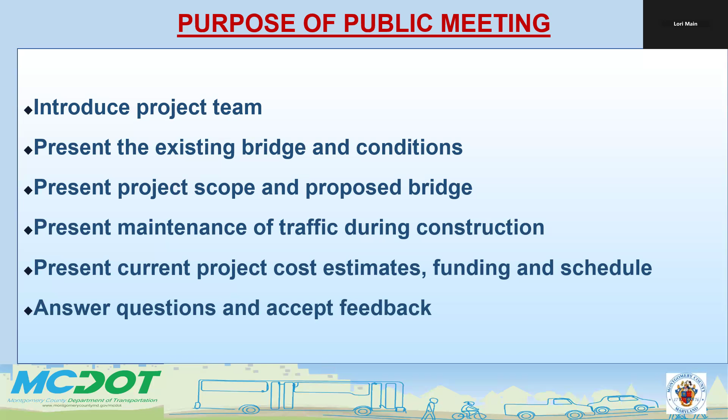Okay, project team. So the project team consists of Montgomery County Department of Transportation, Montgomery Planning, Rustic Roads Advisory Committee, and Mercado Consultants as the engineering consultant. Throughout the design of the project, we work and coordinate with all these team members to successfully implement the project. Montgomery County DOT is the bridge owner and responsible for managing the design and construction, securing the funding, acquiring of right-of-way or easements, public outreach, collecting community input, and coordinating the project with relevant state and federal agencies.

Montgomery Planning is providing recommendations for master plan implementation. The Rustic Road Advisory Committee is providing recommendations to preserve the historical, scenic, and agriculture character of the area. Mercado Consultants is the lead consultant and is providing engineering services to develop contract documents, including design plans, specifications, and construction cost estimates. The consultant will obtain all the required permits and will also provide engineering services during bidding and construction.

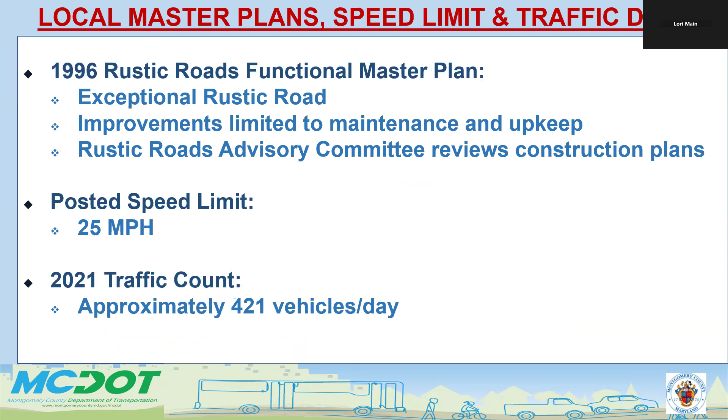Okay. I think we skipped a slide there, didn't we? Oh, there we go. Okay. Now go back. One more. There we go. All right.

Uh-oh. Oh, Lori, what happened here? Sorry, guys. Brian, when you use the mouse as a pointer, can you let go of it after you do that? Because I can't use the mouse at the same time as you are. Okay. So yeah, just as soon as, okay, and this is the next slide. Sorry about that, everyone. All right.

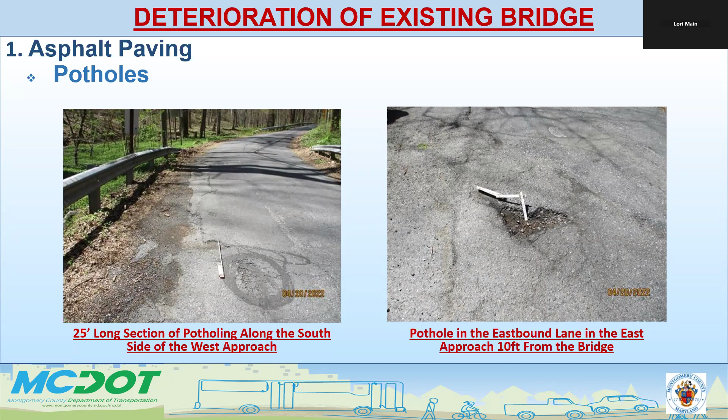Okay, so the most recent bridge inspection conducted in April 2022 revealed continued deterioration of the existing bridge. We will cover the most evident issues starting with the top side. Here we have two photos showing pavement potholes. These are on the approach roadways. The potholes are minor issues and don't pose an immediate hazard. In the next couple of slides, we will take a look at the underside of the bridge. Next slide, please.

So basically the deck is a steel corrugated plank deck with asphalt on top of it. And it's really a porous decking type system. So it lets water through it down to the metal components underneath the decking and the steel beams. So all that water and salt that gets dumped on it in the wintertime gets down there and just corrodes the beams. Next slide, please.

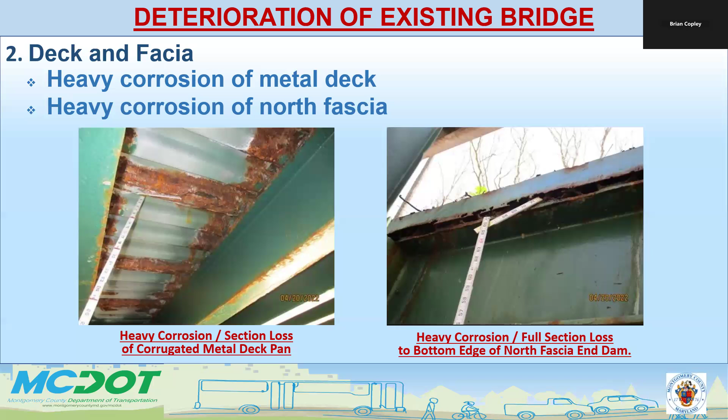Let's see, I'll attempt to use the pointer here. Now I'm screwing it up again. I won't use the pointer. Can you go back, please? You have the pointer now, Brian. Okay, can you go back a slide? Absolutely.

So the first question you might have is, is the bridge safe? Yes, it is safe. The April 2022 bridge inspection did not identify any immediate hazards. The bridge was rated to be in poor condition and is scheduled to be inspected on a regular basis, with the next inspection being April 2025. MCDOT is working proactively to rehabilitate the bridge before it becomes a safety hazard. Next slide, please.

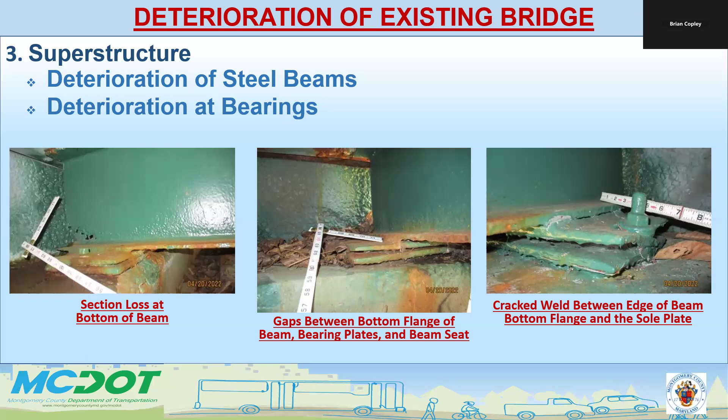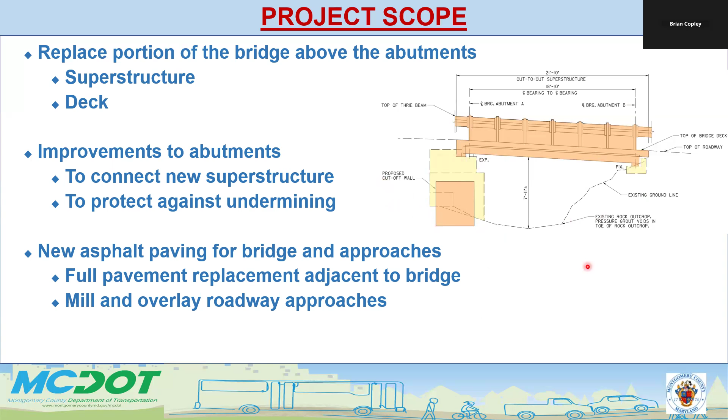That's the superstructure. A preliminary investigation revealed that replacing the abutments would significantly complicate the project due to the presence of rock. By reusing existing abutments, we are able to simplify construction and reduce the overall cost of the project.

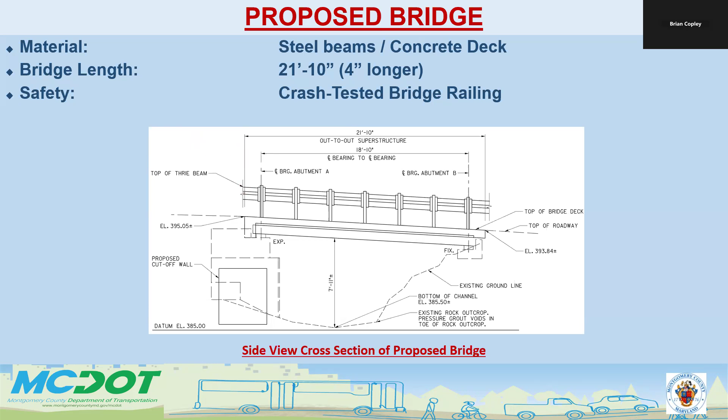Next slide, please. The bridge width will be increased slightly by 6 inches to allow for a clear roadway width of 18 feet. This is the clear roadway width here, from railing to railing. The intent is to better accommodate farm equipment used by the local farmers. A modern safety railing will be provided on both sides of the bridge.

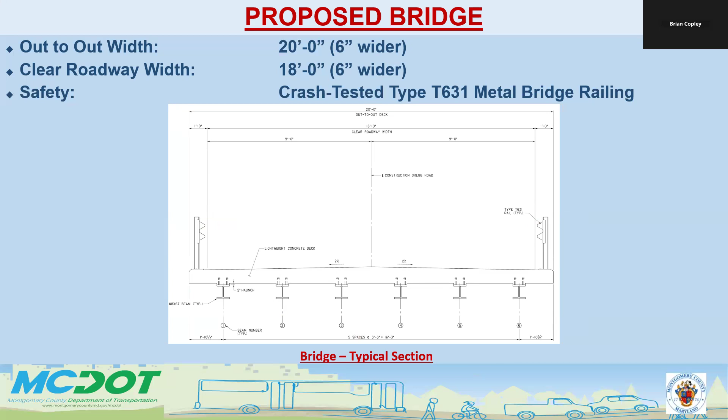Next slide, please. So this is a photo of the approach roadway looking east towards the intersection with Gregg and Georgia Avenue. The bridge is located right here. Next slide, please.

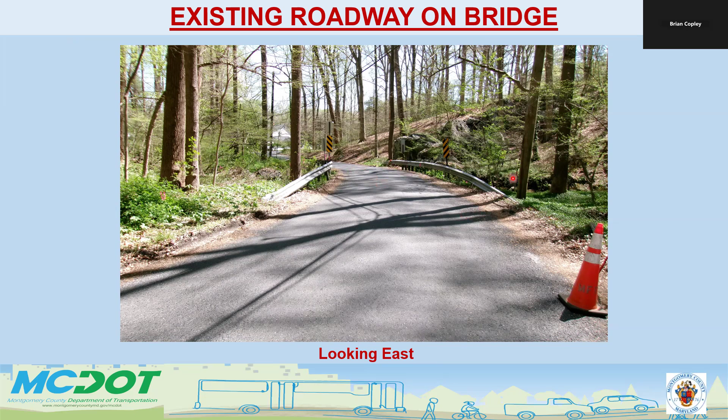So here we have a plan view of the proposed bridge with dimensions. The proposed dimensions are over here. We have 18-foot clear roadway, 20 feet, 22 feet out to out. Existing over on this side, 17.5-foot clear road, 19.5 out to out. The cutoff wall will be installed over here to help protect the abutment.

The water flows from the south side underneath Gregg Road towards the north. It basically comes in from the west, like heading east to the south underneath like that.

As part of this project, MCDOT will work with owners of properties along Gregg Road to secure any right-of-way or temporary access rights we need to facilitate the construction. Our property acquisition section will be reaching out to the individual property owners as needed. The adjacent properties are private property. There's no parkland here. Next slide, please.

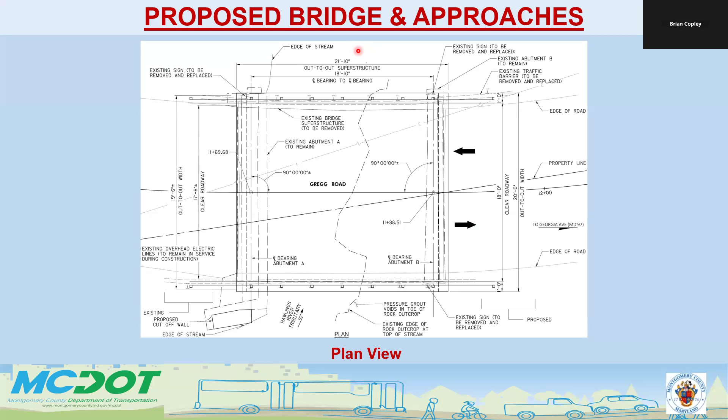So to do this construction, because of the narrow aspect of the bridge, we're going to have to close the road to safely do this construction. Not only for the construction workers, but also for the traveling public. This is the safest way to go about doing this project.

Unfortunately, as you can see, there's really no good short detour route around this project. So working with our Division of Traffic Engineering, our proposed detour route is as shown here. It's approximately 5.2 miles. Depending on the direction of travel, motorists may use Georgia Avenue or Zion Road to get to Brookeville Road.

The detour will be in place for the duration of construction, currently estimated to be 4 to 6 months, but a good contractor could probably get it done quicker than that. But to be safe, we're going to say 4 to 6 months. Next slide, please.

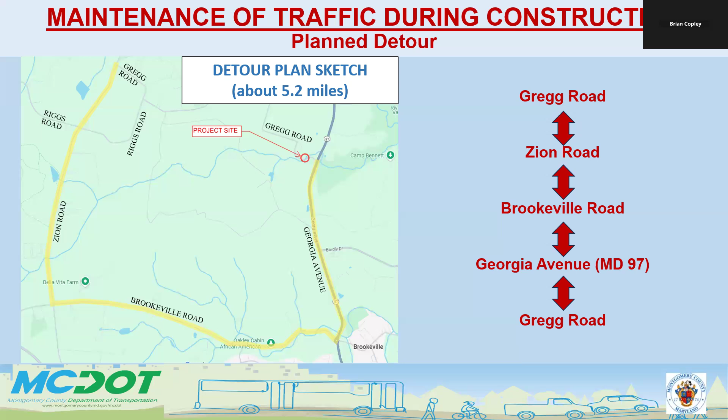So we are about midway through the design process, with the design about 65% complete. This design is fully funded by Montgomery County, with general obligation bonds being the primary source of funding. The estimated cost to complete the design and obtain permits is about $225,000. The estimated cost of construction is about $1 million. At this time, construction is not funded.

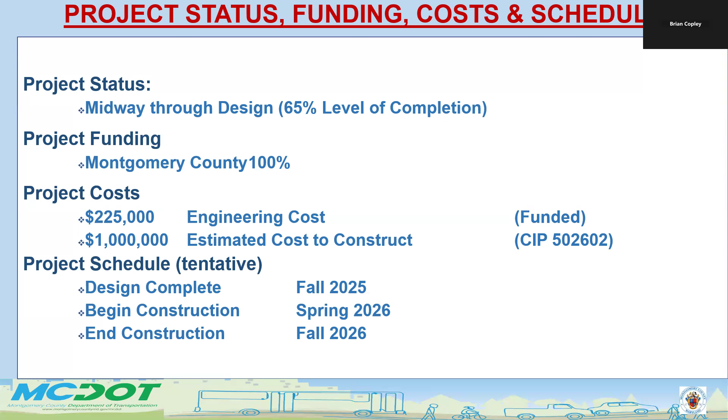So the next step of the project is to proceed with the final design based on comments we received from the listed permitting agencies and feedback from the community. The project team welcomes any comments you might give tonight. After tonight, you will have 1 month to provide the project team with your feedback. You may submit your feedback by using the online comment form at the provided web address. The project team will evaluate all feedback and consider it during the final design.

Here's the project web address. Here is Rashid's contact information. He is the design project manager for this project. Please do not hesitate to reach out to him if you have any questions or need additional information related to this project. The best way to reach out is via email, but if you prefer to reach out by phone, he still has one of those.